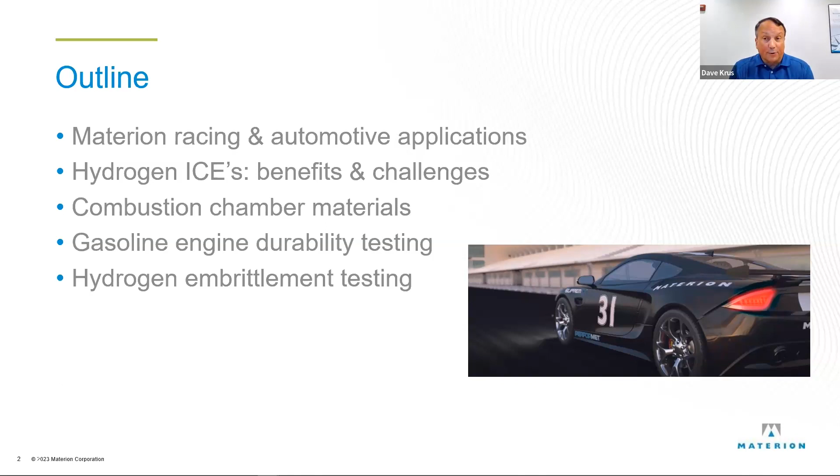So just a very high level glance at Materion. We have three business units: electronic materials, which is very semiconductor and electronics based; performance materials, that's my group or my business unit; and a precision optics unit. Our founder was working on metallurgy in the 1920s, Charles Brush II, who founded the company and actually discovered, or isolated, the element beryllium.

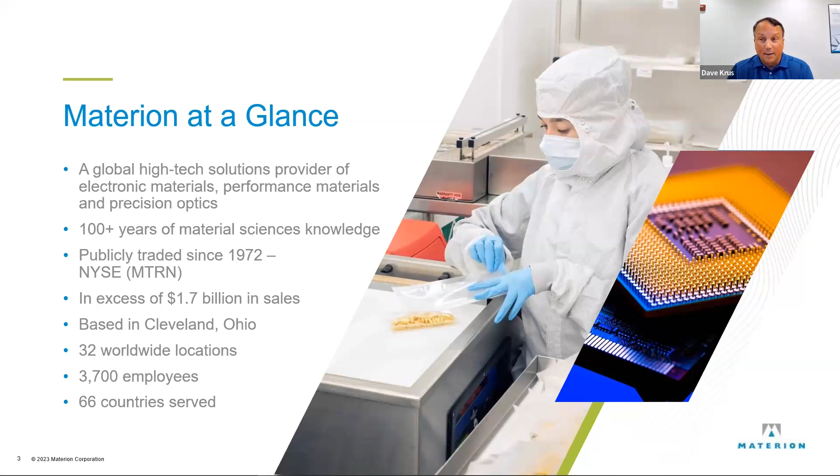That 1.7 billion is, we're on a high growth rate because it was less than $1 billion not so long ago. And that 3,700 employees, I remember a 2,200 number not very long ago. So it's a dynamic growing company, and our products touch you every day, whether you know it or not. Talk about where we are in automotive industry and in racing.

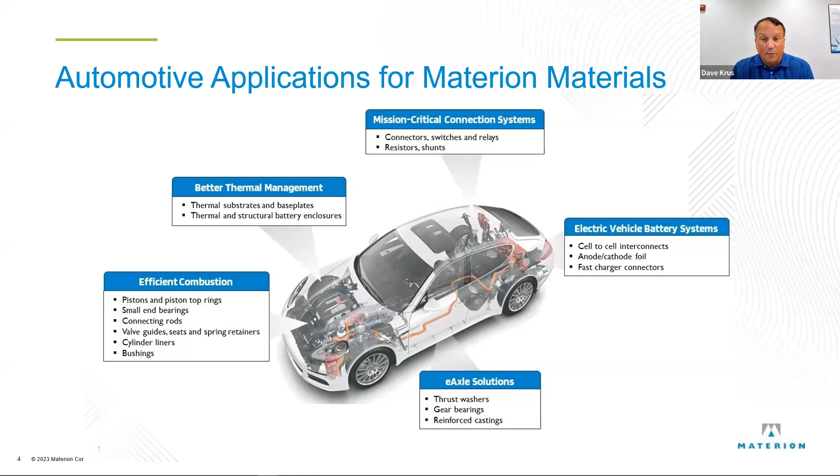The efficient combustion, those are the parts we're going to be talking about here. Those are the ones that you know from racing. I won't go through all of them, you'll see them. And the other ones, as we're following the industry, just like we are here now with hydrogen, we're following the industry into the EV realm, where we have some dissimilar metal connections that do nice interconnects, some e-axle bearings, which are the same thing as the engine bearings, and thermal management substrates. So automotive industry is a focus for us, and by relationship, racing is the R&D, racing's a focus.

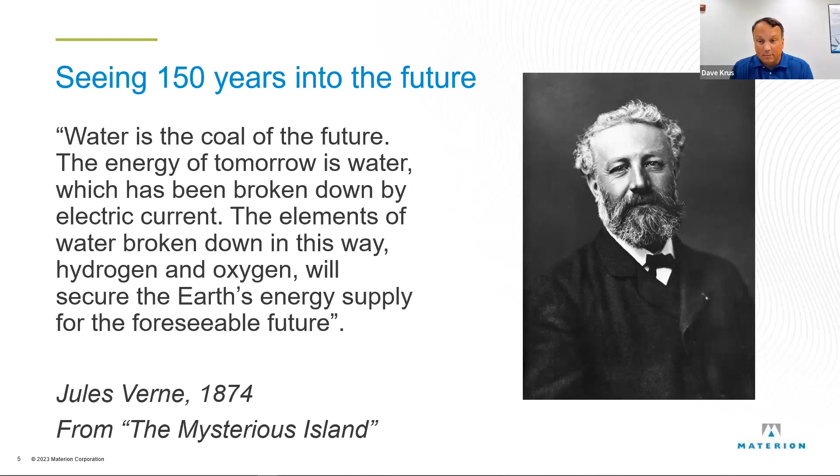150 years ago, Jules Verne wrote in The Mysterious Island that we're going to use electrolysis to make hydrogen for energy. So it's been around for an awfully long time. And as you say, we're going towards electric vehicles. Now, hydrogen is necessary, because it's a green energy. If it's produced greenly, it's a necessary component of future energy for us.

Hydrogen ICEs, what's good about them? Well, tank to wheel, there's zero CO2 emissions because the output is water for the most part. And if you can use green hydrogen, so you're not making it using coal, you're making it using wind power or solar or something green, you've got well to wheel green or zero emissions. And that means you're not also putting holes in the earth, another environmentally friendly thing.

The other thing that's nice about hydrogen from an internal combustion engine point of view is we're almost ready to go. We have factories, we have technology already there around the fossil fuel engines. Putting hydrogen in them causes you to do a few tweaks, but it's ready to go. Whereas something like fuel cell, where I'm saying it's a technology bridge, is going to take longer to ramp up. And as a technology bridge to fuel cells, you'll have things like those hydrogen fueling stations and safe tanks to put them in, and a whole hydrogen delivery infrastructure that could come along with the hydrogen ICE, ready for when fuel cells are ready to be put where they work best.

Another benefit versus an electric vehicle is it refuels just like gasoline or diesel. It's very quick refueling. And from a racing perspective, it mixes with air very easily and gives a fast combustion rate. So you got a very responsive engine, and it sounds like we're used to for racing. It roars. So it roars or it purrs, one of the two.

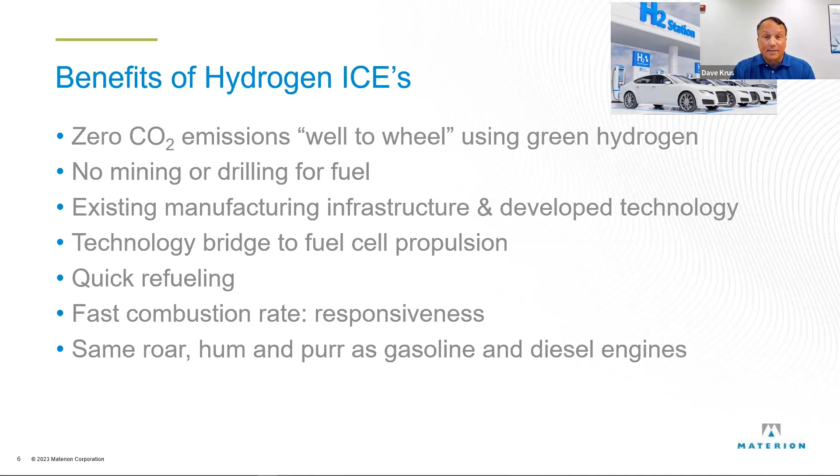Yeah, and there's been a lot of investment in this recently. The first three of them are heavy duty engines, but Cummins just spent over 450 million to upgrade their Jamestown plant to have fuel agnostic engines, which means they can burn gasoline, or a fossil fuel, they can burn natural gas, another fossil fuel, and hydrogen. JCB has just put £100 million project together for super efficient hydrogen ICEs, and next year, Deutz is going to start offering stationary power gen ICEs, and they're using Mahle, a name that we all know, for the piston, pin, and ring pack.

And then, this comes over to racing as the OEMs get interested in it. Toyota Gazoo just unveiled this year at Le Mans their GR H2 Racing Concept vehicle, hydrogen ICE, and they're going to race it in 2026. And as I said before, Le Mans is going to have a class in 2030. And AVL RACETECH, just using water injection, has made a 2-liter 400 horsepower engine specifically for racing. And as the president of Yamaha Motors says, it allows us to be carbon neutral while maintaining our passion for the internal combustion engine.

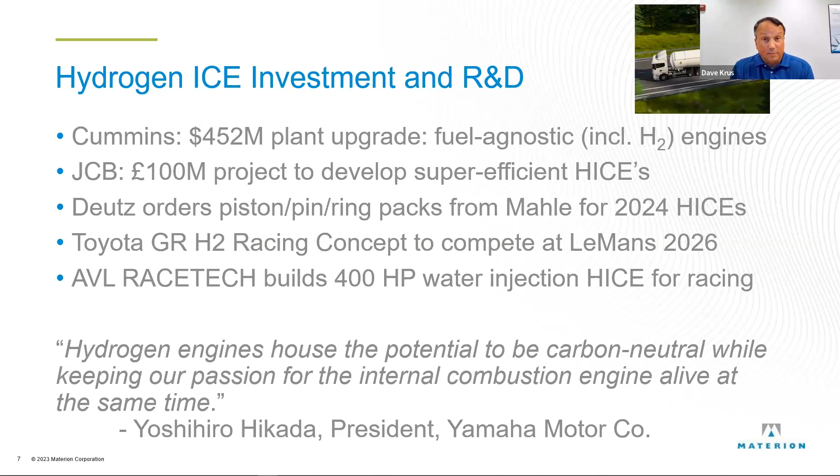So it's on its way, but there are some challenges—and these are challenges that we can overcome.

High production costs right now. In Norway, they've worked on it and got it down so that it's at par with natural gas—Norway natural gas, not US natural gas. So it's still a relatively high price, but that's something being worked on.

Energy efficiency isn't as good as electric motors, but you can get close to it. There is work now being done to get it close to fuel cell electric motor efficiency or electric vehicle efficiency.

Safe and effective storage and handling. People are worried about hydrogen, but we did the same thing with fossil fuels that are explosive and poisonous and will asphyxiate you. And we can handle those just fine. We don't think about them as a danger—or, I mean, we know how to handle them safely. Let's put it that way. They are dangerous, but we know how to handle them safely. The same will happen with hydrogen.

The other thing, as I mentioned, efficient combustion means a high combustion temperature, so there is some NOx emissions that need to be controlled in the engine design as much as possible. And there's also thermal management issues—you're getting more heat, and you've got to have a way to either remove it or keep it where you want it. So materials that can conduct very well and operate at high temperatures are important.

Running a rich mixture in hydrogen isn't like running a rich mixture in a gas engine. It doesn't lubricate. So you need low friction materials that work well in starved lubrication conditions.

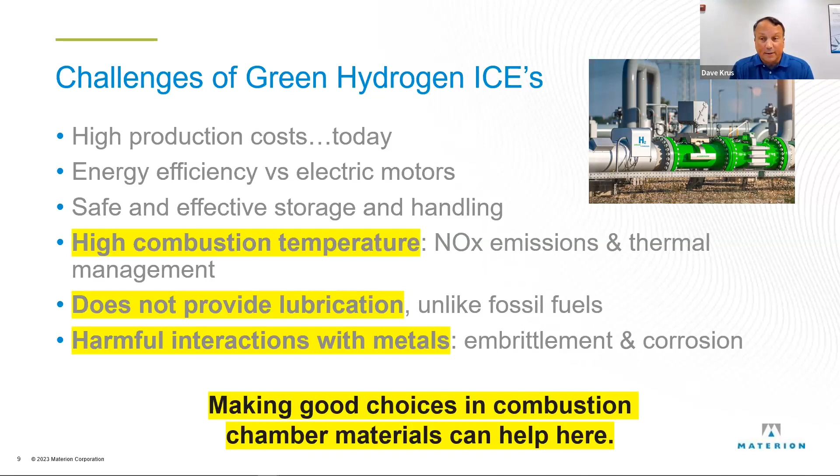Those last three bullet points remind me of the mom watching the teenager go out the door at 9 o'clock at night saying, make good choices. Well, that's somewhere where the material choices you make can help. You need to find materials that can work in low lubrication conditions, high temperatures, and aren't bothered by the fact that there's some hydrogen around.

So the materials we're going to look at today are our Supremex metal matrix composite. That's an aluminum alloy reinforced with 25% silicon carbide. It's been used in Formula One pistons before they banned it, and it's actually currently in the Gordon Murray T50, which we'll talk about later.

Compared to aluminum alloys, it's the same density—within 2%—but it's 50% stiffer and has much better fatigue strength. It makes a fantastic 2-stroke piston, by the way, with a lot longer life than the normal hypereutectics. And versus steel, the parts can be made nearly the same size, a little bit larger volume, but with the same stiffness and strength at a much lighter weight.

Our PerforMet alloy—it's a copper alloy, kind of an alloy soup: copper, nickel, silicon, chromium, zirconium. It's used in valve seats and valve guides in a lot of racing classes. It's more popular in North America than in Asia or Europe. But compared to most other bronzes, other than copper beryllium below it, it's a lot stronger, a lot harder, and even more so than the copper beryllium, it holds its strength at high temperature. It also has very good thermal conductivity, so it can move heat away from the valve head, or distribute it around away from hot spots in the head.

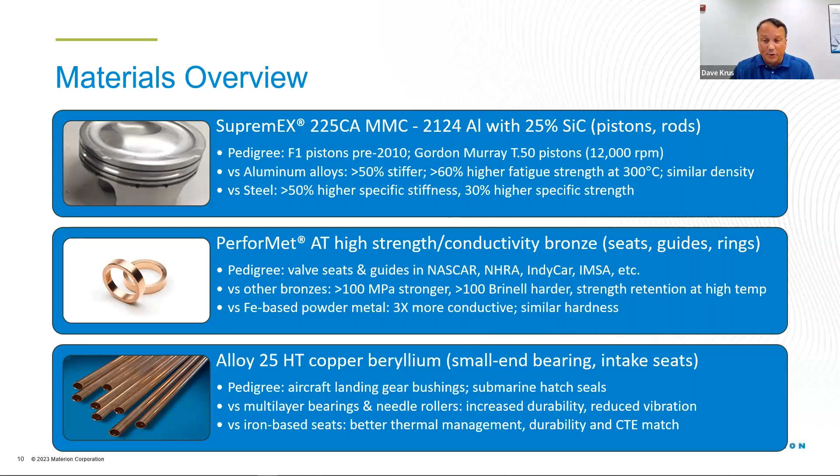The alloy 25, I'm just going to give some examples because it's been around for so long that people know it well. It's also called copper beryllium 2, 1.8 to 2% copper beryllium. It is the original copper alloy intake valve seat at the high end of racing, and it's still widely used.

There are some places that will not convert to anything else like a PerforMet alloy. And it does small end bearings very well too. If you see a very expensive connecting rod with a copper alloy bearing in it, likely it's that alloy 25, copper 2% beryllium.

KTM's Motocross Action Mag said that it not only reduced friction but improved durability over a needle roller bearing. We've heard from passenger car designers that when you can switch from the needle roller to a plain sleeve effectively, you get rid of a lot of noise, vibration, and harshness in the engine.

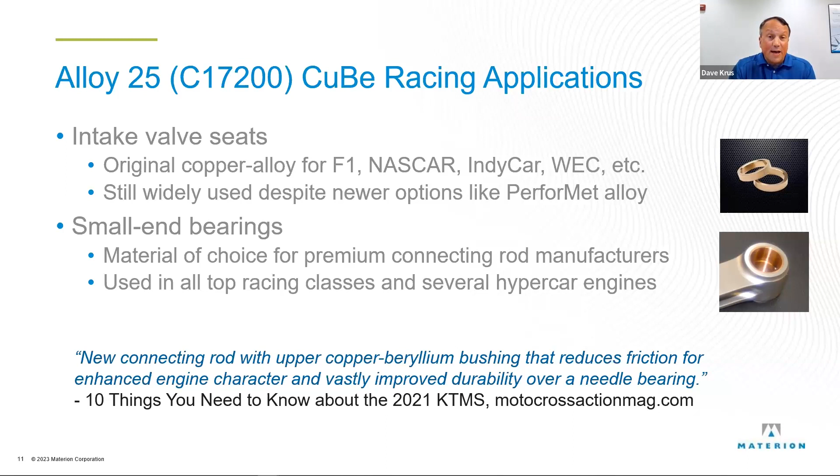So that's all we're going to say on that. Well, other than that, sorry, I forgot I had this here. One extreme example of alloy 25 is Jay Upton's 8,000 horsepower top fuel bike.

Jay actually makes the whole top of the combustion chamber out of alloy 25. He gave me these photos. It doesn't even need valve seats because it acts as the seat itself, due to the thermal conductivity and high strength of the material.

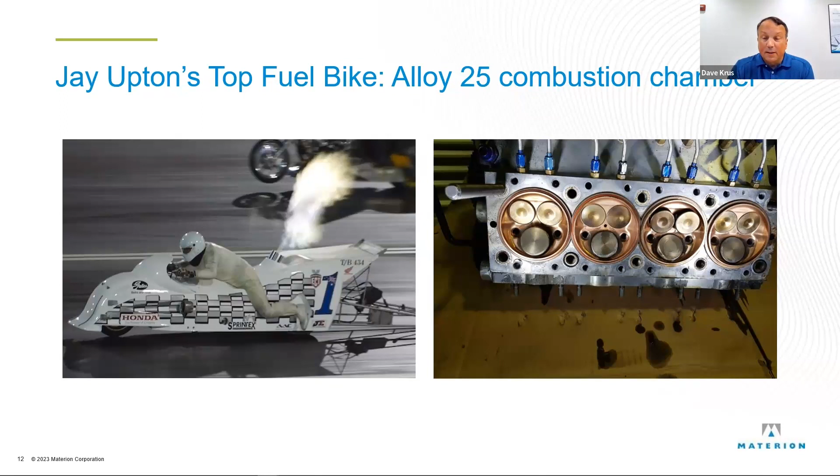Moving on to the other two materials. In the last webinar, last September, we talked about some engine testing we did with Cosworth in the UK. There was a 2.3 liter EcoBoost crate engine that we had them redesign specifically, the piston, the pin, and the rod, to minimize the amount of mass.

As you can see in the green box, they took out 30% of the mass, 1.4 kilograms, by reducing the piston weight by 20%, just making it thinner in places where the aluminum had to be more bulky. By replacing a steel rod with an aluminum rod, they took 40% of the rod mass out. At the same time, they installed PerforMet seats and guides.

The engine mapping and all of that is in a white paper that we have. I won't go through it today, it's in the other webinar.

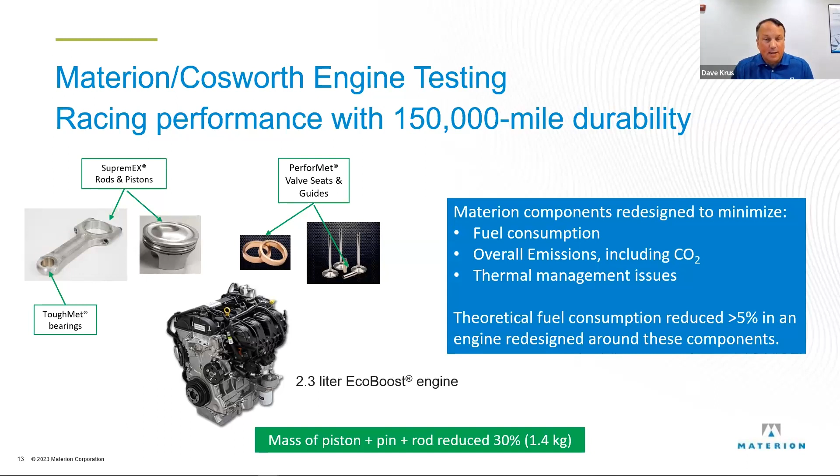Theoretically, we should have seen a 5% reduction in fuel consumption because of the mass reduction. We didn't, because the engine wasn't designed around it, so it was running naturally unbalanced. But going on to the durability test, this is going to show that these materials are set to last.

We put a fresh set of those parts in and did a 150-hour wear test. That's 15 minutes at idle, followed by about 13 minutes at max torque, about 10 minutes at max power, and a couple more minutes at 90%. Rinse and repeat, 225 times, giving you 96 hours at wide open throttle.

I've got the data if anyone wants to see it, my email address is at the end of this. Send me an email, I've got 300-some slides of data from Cosworth on this. All the data was stable, aside from the fact that they blew the head gasket twice, which meant they were running the engine really hard.

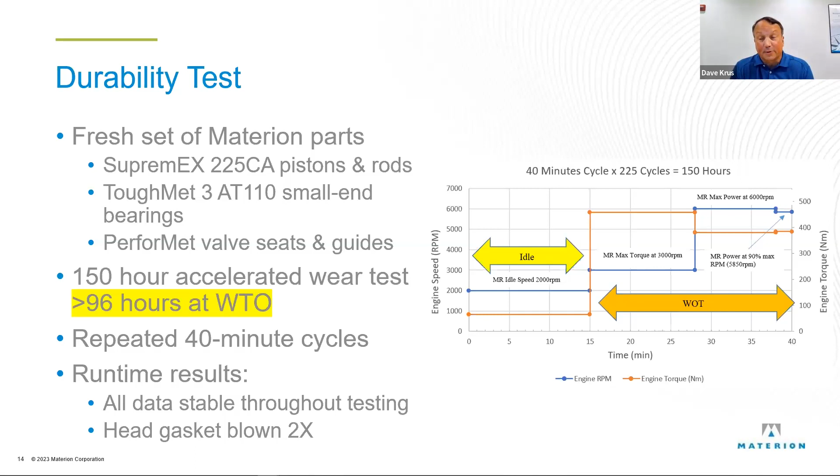So let's look at very quickly what happens. On the engine strip, the valve seats were in perfect condition. The recession was 1 to 2 microns, unmeasurable. The guides looked brand new as far as I could tell, and the valves themselves had no measurable wear. This meant the seats were providing some nice resilient cushioning onto the surface of the valve head.

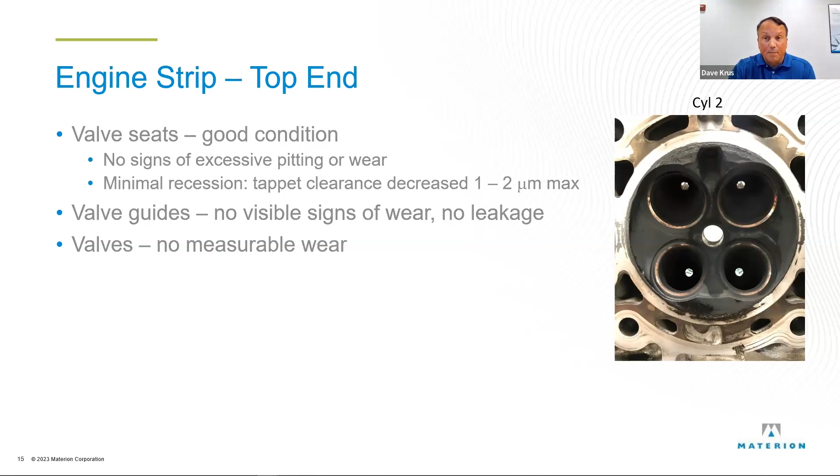The pistons look great. They really did what they were expected to do. Cosworth engineers knew these things run in Formula One, so they expected this to happen. There were a couple of issues in the lower left of the top groove flatness and a little wear in the rings. Cosworth themselves have overcome that, and we've figured out how to do it ourselves, so we can tell you how to do that.

They were so enamored with the pistons that they decided to put them in the Gordon Murray T50, the standard for that 12-cylinder, 12,000 RPM, 660-some horsepower engine. There's a vlog on YouTube with Dario Franchitti talking to Gordon Murray about the design all the way through getting it onto the track and testing it. Episode 9, where they get it up to 12,000 RPM on the dyno, is spectacular to see. I recommend that to people.

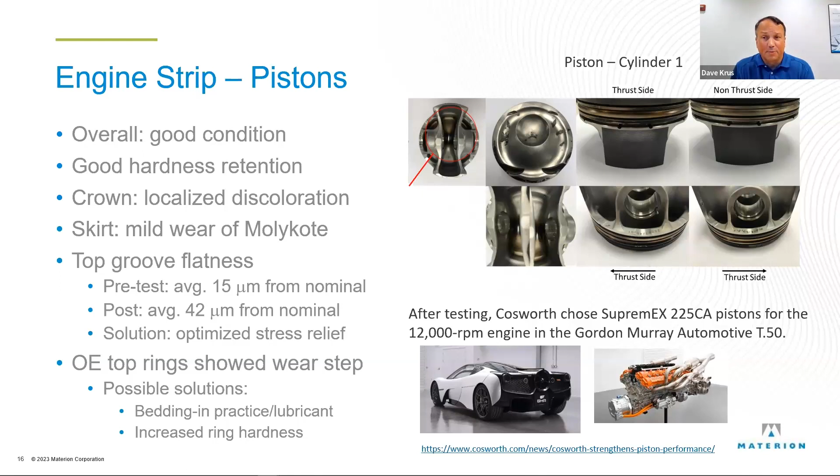And there's that roar, or more of a whine, but a beautiful whine that we were talking about not wanting to lose. With the connecting rods, okay, these aren't going to be directly in the hydrogen ICE, they'll be in the bottom end. But the fact that you can take a connecting rod, an aluminum material, and substitute it for steel is notable here. The Cosworth engineers had not seen a connecting rod in this material run before.

They were impressed. There was a little bit of fretting on the back end of the bearing because thermal expansion is different from steel, so it lost a little bit of the interference fit. A better bearing selection or matching will help with that. The ToughMet bearing material in there worked just fine. We've had a number of connecting rod manufacturers tell us that ToughMet and copper beryllium are indistinguishable, so we assume copper beryllium would have done the same thing there.

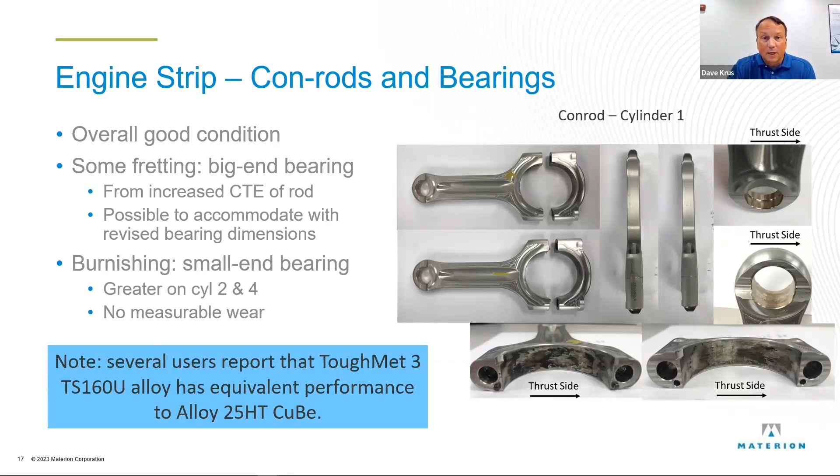But are these materials candidates for HICEs? They're all proven to work in racing and durability for on-highway engines. They have meaningful benefits, working in tough conditions of high heat and low lube, but how do they do in hydrogen? Do they crack or get embrittled? So far there haven't been many problems to date, like I said at the beginning, but there hasn't been a lot of time in the engine so far.

I won't go into the mechanisms of hydrogen embrittlement because there are so many different mechanisms, but essentially hydrogen gets inside the metal, either present when it's made or finding its way in, and then goes to defects. Those defects make things brittle at the defect, and as they stretch and get bigger, the hydrogen rushes to it and makes it more brittle. I'm being very simplistic, but that's why over time this sort of thing happens.

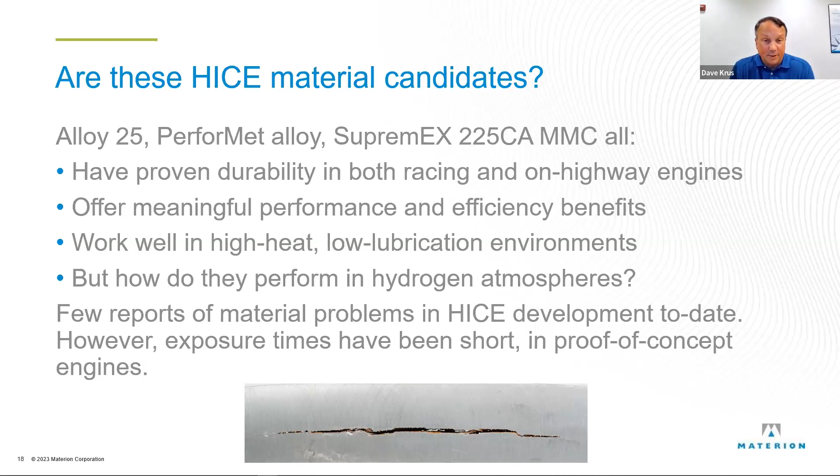The sources to get hydrogen into a material can occur during fabrication - that's all the stuff from 3 to 9 o'clock there. In the making of steel, in casting, hydrogen can be driven in. Welding can do it, as can heat treatment, pickling, and even electroplating, causing the material to be brittle or get more brittle over time. The other ways you can get it: think of a hydrogen tank - pressurized hydrogen can force hydrogen into materials, and corrosion or rusting of metals can do that too.

Let's take a quick pause here. We don't want to get too far out in front of this, because you just showed the piston and the parts that were coated and their condition. First question: what type of wrist pin did you use, and was it coated or uncoated? Because you just brought up what pickling and other processes can do.

That was a DLC coated pin. Yeah, definitely a DLC coated pin. We've seen those materials run on hardened steel and chrome plated pins as well.

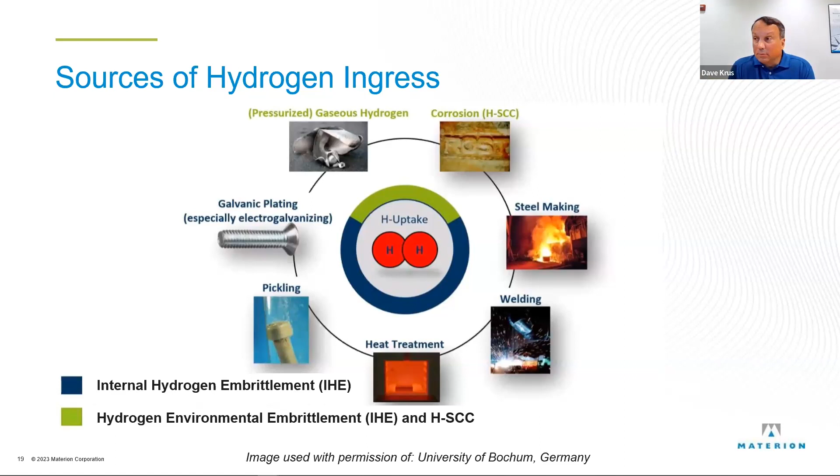From there, I'm going to give just a couple examples of the kind of things that can happen. And as you'll see, this isn't catastrophic failure immediately - it's a failure over time.

The University of Bochum kindly gave us these. I don't know a lot of the history about them, but in offshore wind turbines, these nuts in the nacelle, just after a fretting sort of fatigue situation, cracked after a while from corrosion. The drive shaft in a car, same thing, cracked. Talk about a slow, long-time crack that did some really bad damage - that bridge in Mexico that fell. They definitely chose the wrong steel for that one in a corrosive environment.

So the failures could be catastrophic - they usually are. What happens is, over time, as you pull the metal, you create some more defects. The hydrogen tends to rush to those defect areas and make them more brittle, which then slowly accelerates and makes the cracks grow right where they are.

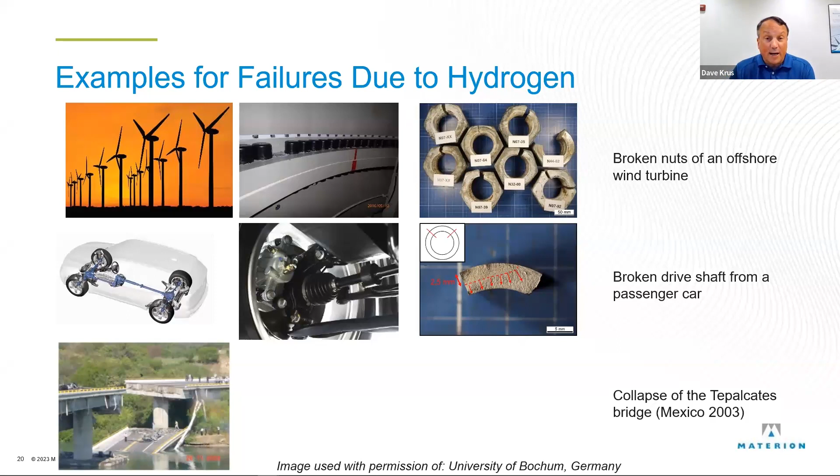So just to go into the materials again very quickly, why we're looking at these materials related to hydrogen: they're all copper and aluminum based. They're face-centered cubic, and the reason I talk about that is that's the lattice structure. Body-centered cubic, which is a steel structure, tends to absorb hydrogen more quickly than face-centered cubic. They all have higher strength values than traditional alloys, and these are right out of production - we haven't done anything to the surface.

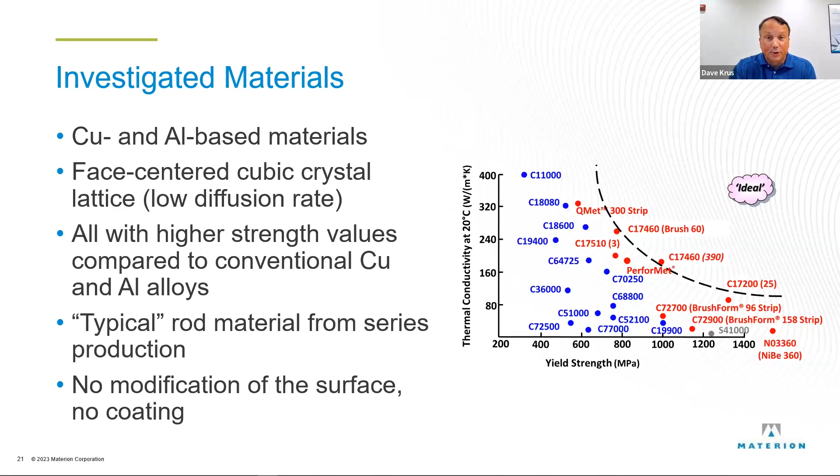This is, if you called us and wanted to put something to test, you bought material from us or one of our distributors, this is exactly what you would get. I won't go too much into the graph of the properties, but let's get a little more materials techie here, as much as I am able to do that.

The alloys or the materials - you've got the copper beryllium, which I mentioned is 2% beryllium with some addition of cobalt. It's the strongest in bulk form and something you could use for engine components like a rod or a tube to make valve seats. It's the strongest commercially available copper alloy. Then the PerforMet, with a lot more thermal conductivity, is still quite a bit stronger than your average copper alloy.

SupremEX can't compare to those two, but it is, as I mentioned, 50% stronger than a standard aluminum alloy because of the silicon carbide that goes into it.

Looking at the different matrices, the copper beryllium gets so strong because not only does it have hard particles in a soft matrix, which is a strengthening mechanism for all three of these materials, but the copper berylides are coherent with the matrix or the lattice of the copper, and they're tighter together. So when they form, they pull the copper matrix together, and that's an extra amount of stress or strength you have to overcome. When you stretch the material, you have to overcome that plus what's already in the material. So that's why it's that strong.

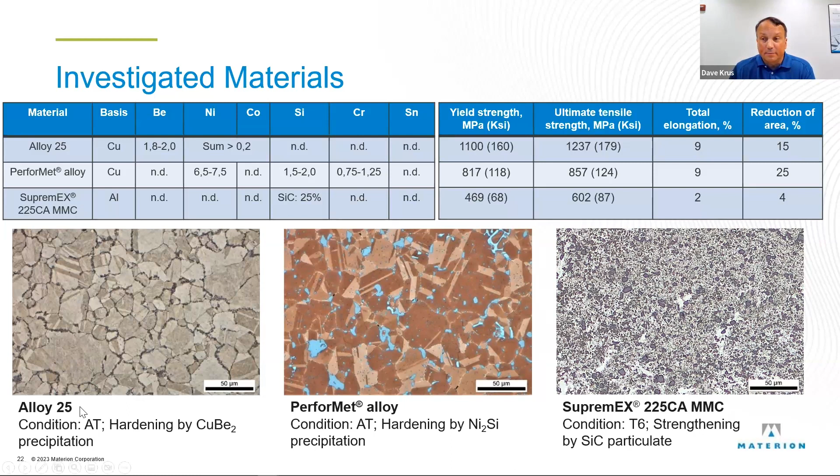When I asked my colleague, Dr. Andreas Freyne, our Director of Technology and Innovation in Europe, to find the best places to test this stuff, he found two really good ones in Germany: Ruhr-Universität Bochum and DECHEMA, top class places. I won't go into the details, but at each one, we did some testing.

The first thing was what they call hydrogen loading. At Bochum, it was gaseous, so a high temperature, 300 degrees C, 21 days of just pressurizing and pushing the gas into the samples. When they were done, they pulled them out, and before any other testing, put them in liquid nitrogen, because that kind of holds the hydrogen in place. It doesn't allow it to move if it's that cold.

And for a higher concentration of hydrogen at the surface, you use the electrochemical loading, and that's a sodium hydroxide and arsenic bath that it's in, which puts more H2 at the surface, and you would expect more loading, more hydrogen passing into the samples at that point.

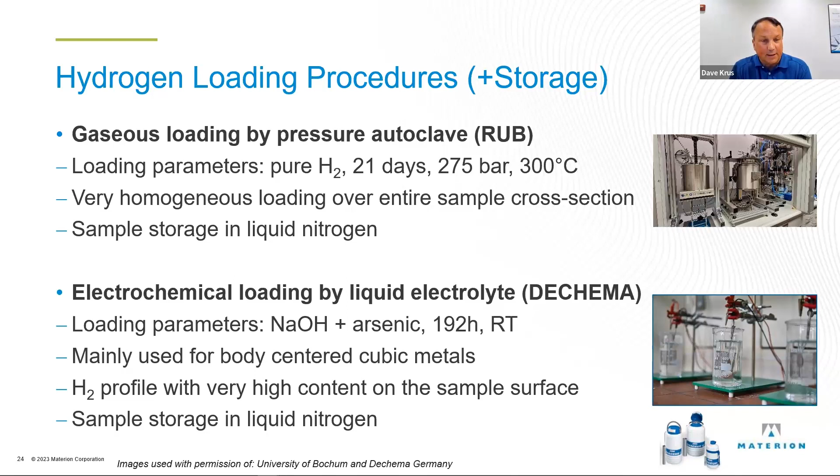So the techniques that we used, we can give you details on this, but mainly what we're going to be talking about is the thermal desorption mass spectroscopy, TDMS, and that will give the total hydrogen content in the materials. There's also a permeation cell. We don't talk about that much in this presentation, but that shows how the hydrogen moves through the samples.

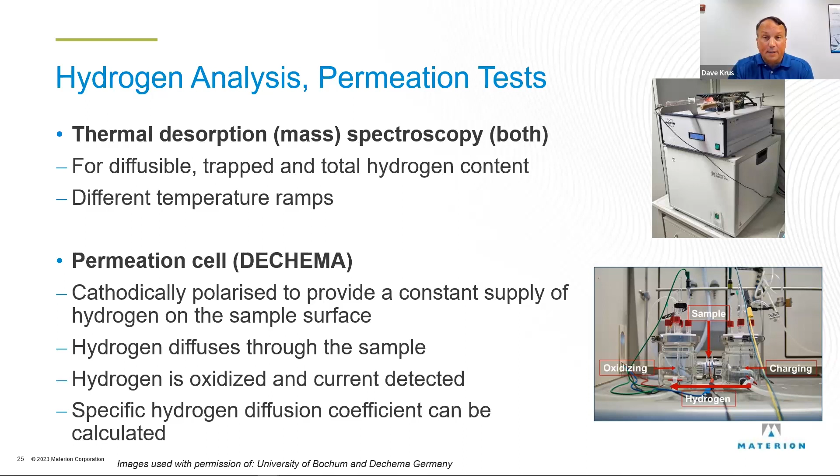Getting to the heart of the matter here, in the delivered condition, all three of these alloys at TDMS didn't show any hydrogen. You couldn't find it. So we're not putting hydrogen into them in the fabrication of them. With the gas loading, those are still very small numbers. They're not absorbing a lot of hydrogen. That's 0.02 parts per million, so put 6 zeros on the other end of that thing.

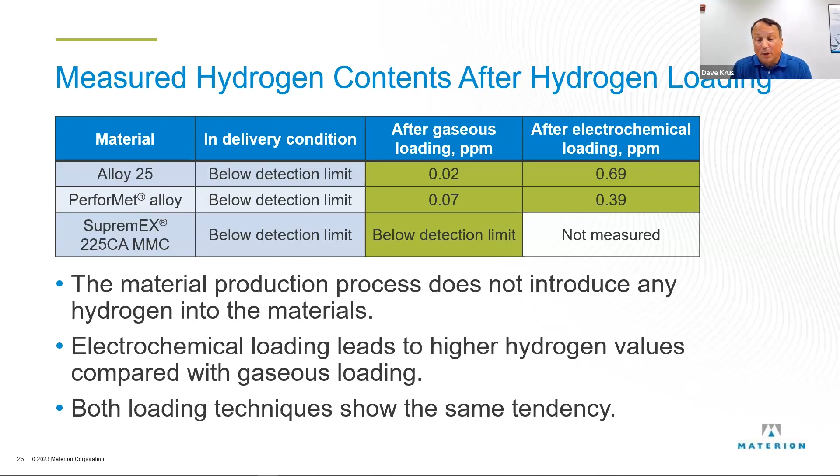And the Supremex was below the detection limit. We have not yet used the Supremex in the electrochemical loading in the liquid bath, but as you'd expect, it's slightly higher, but still below 1 part per million. So it's not much hydrogen getting into these samples.

Then the next thing we looked at was slow strain rate testing. As I mentioned, the slow strain rate, it's not a normal tensile test. You can see the tensile bar there just to the right in between the two photos. It's not pulling that at speed like you do in a production facility. It's a slow tensile test, which allows some defects to form and the hydrogen to move into those defects.

And then the values we looked at were the relative elongation and the relative reduction in area. Elongation is how far that sample is going to stretch before it breaks, so it's the total plastic deformation, and the reduction in area is how narrow it gets effectively where it fails, how much it necks down. So loaded versus unloaded means at 100%, absolutely no effect.

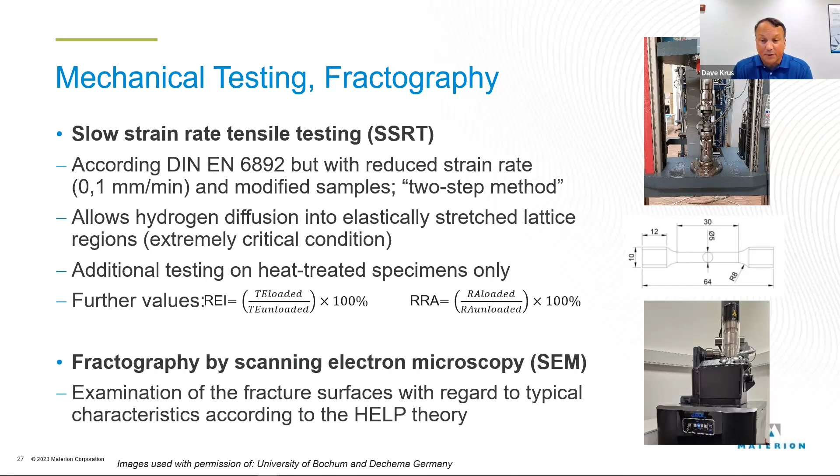The thing about nickel is, nickel is good in high heat, and it's very strong and very hard, nickel alloys. They're not great in friction. They don't conduct heat very well, and they're very heavy. So there are a limited number of places where you can use them.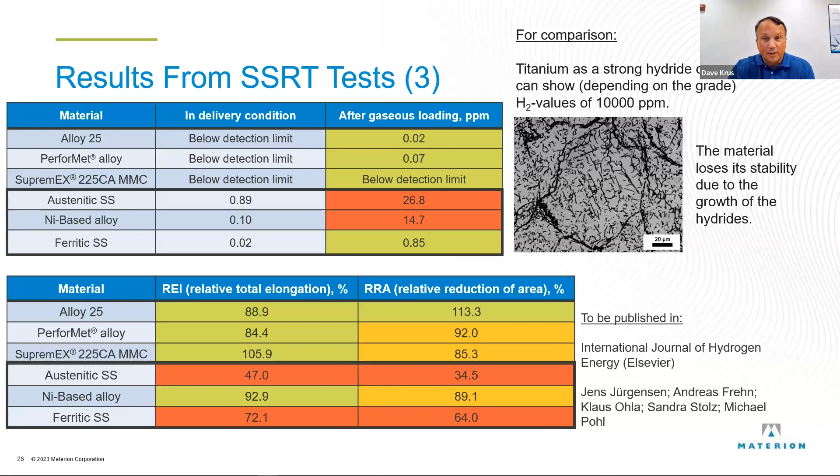So titanium isn't something that could be used there. Trying to get to some questions here, leaving a little bit of time. Just going to do a quick review to say that hydrogen ICEs are going to be here. Racing is going to be part of the development. There are challenges. Embrittlement may be one of them for materials that are used with hydrogen. Now, as I said, the metal toolbox, you've got some materials that aren't going to be affected and also have benefits for running in an engine.

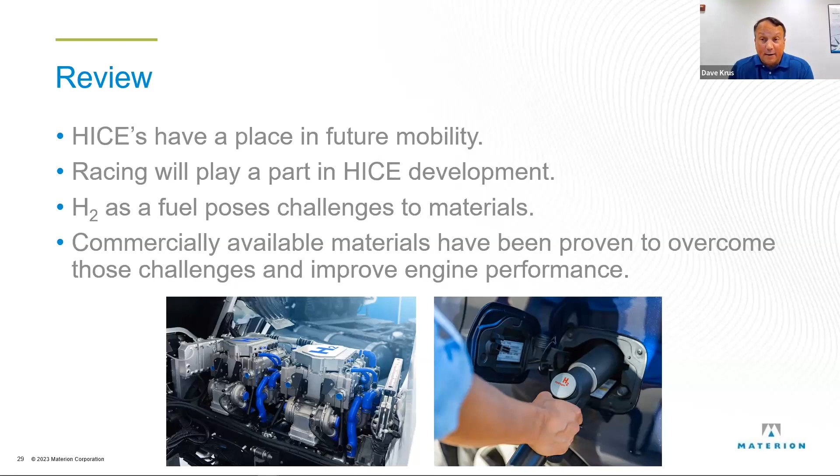Well, thank you, Dave. And yeah, folks, I know you're out there, and I know everybody's been just like I have, watching and looking at numbers. So if you got any questions pertaining to that came out of this, please speak up. We got time, like I say, to discuss that. But from where you were a year ago to now, very impressive. And once again, the idea of the process and the protocol that you put in place seems like it's repeatable, and you can rely on it when you start crossing the two, what you did earlier and what you're doing now, I'm assuming has matched up quite nicely.

EPARTRADE is a digital platform that we've created basically to make life easier in the business community of auto racing. On EPARTRADE, there is no e-commerce; it's literally a connection, just like at a trade show. So now, any time of the year, a buyer could reach out to a supplier. When you see a product that you're interested in, all you need to do is click on request more information, and then from there it is forwarded directly to the buyer or to the supplier. EPARTRADE really eliminates having to travel, closing down your shop. Now you have a place to showcase globally your racing product and technology.

Land speed record holder George Poteet's Speed Demon rocketed 481 miles per hour at the Bonneville Salt Flats. You don't go that fast without ARP fasteners. There is no way that we could go the speed that we've gone, the number of times we've gone, with a lesser quality bolt than ARP supplies to us. And we absolutely wouldn't be where we are today if it weren't for ARP. When failure is not an option, it's ARP-bolts.com.

We're Performance Plus Global Logistics. Our team of dedicated performance industry and logistics experts get valuable cars and components to the track on time in top condition. We provide expedited logistics solutions for the performance industry using direct routes instead of deferred options, and communicate all necessary information to the appropriate resources to meet regulations and ensure a smooth transit and secure delivery, both domestically and internationally. We exceed customer expectations by providing best-in-class service with an efficient and cost-effective system in place. Contact us today to book your next shipment.

You work as hard as your truck, and you have no time for downtime. That's why more truck owners trust Blue Def, America's number one diesel exhaust fluid brand. Each batch is guaranteed pure, so you can avoid costly repairs caused by inferior DEF. Demand America's best for your truck. Blue Def and Blue Def Platinum. Put trust in your truck.

With ShopMonkey, we've been able to grow the shop by 20% in gross sales since implementing it in the shop. Everything that we were doing before has been sped up with ShopMonkey. All of our parts ordering, all of our approvals, all of our mechanics knowing what to do next. I've had friends that are in the trade that own shops ask about ShopMonkey, and I highly recommend it just because of easy use. There's nothing like it with that kind of platform.

With roots in the Midwest that date back well before the Model T, Fifth Third Bank has a long history of serving the needs of automotive companies. While much has changed over the years, our passion for helping businesses put cars on the road and on the track has not. Today, we are more committed than ever as a member of SEMA, a founding member of PRI, and a sponsor of multiple race teams across several racing series. For over a decade, Fifth Third Bank has been a staunch supporter of our industry and a great partner for many companies in the motorsports field. Our business has been growing extremely fast, and really we could not be where we are today without Fifth Third. They provided amazing strategic advice, the capital we need to support our phases of growth. They are true partners for me now, and what they do with their involvement in motorsports is untouched in this community. Where can we take your business? Fifth Third Bank.